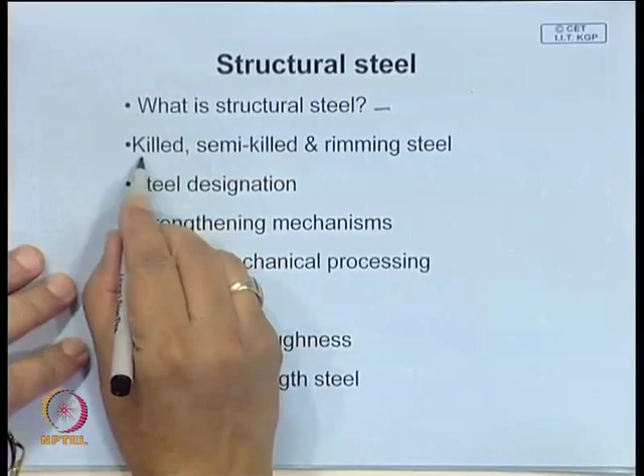Here we will first learn what structural steels are, then talk about a few important points. There are steels which we use, put into three categories: killed steel, semi-killed steel, and rimming steel, and we will learn what they are and how they are produced. We will also learn a little bit about steel designations.

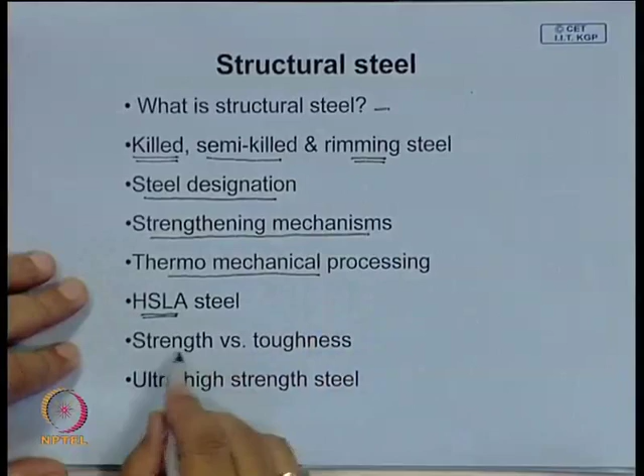We will talk about strengthening mechanisms, and find out which mechanism is most applicable to improve the quality of structural steel. We will talk about thermomechanical processing, by which this is achieved. We will talk about high strength low alloy steels, also known as microalloyed steel. We will talk about the relationship between strength and toughness, and also learn what is meant by ultra high strength steel, how they are produced, and what goes into improving the strength of steel.

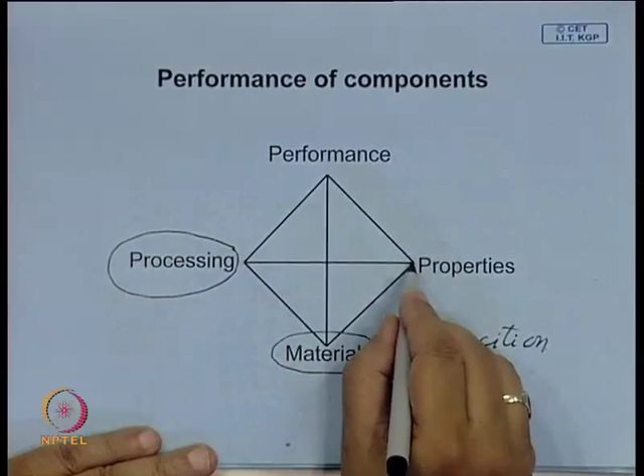We talked about this tetrahedral concept, where the properties of materials depend on composition, that is, the chemical composition determines the property. Similarly, the property also depends on how you process the material. For example, a fine grain structure will have higher strength, so how do you produce a fine grain? All of this affects the properties, and together these affect the performance.

Last class we talked about the limitations of hardening a steel, because this is totally dependent on the section size, and in many cases if the section size is large, it cannot be hardened. We have seen that by quenching, the strength of steel can be increased manyfold, so this would obviously be the most obvious choice for strengthening, but it cannot be applied because a full martensitic structure can be attained only over a very limited thickness, depending on the type of steel used. This has been utilized effectively in certain cases by modifying the composition, and we talked about case hardening.

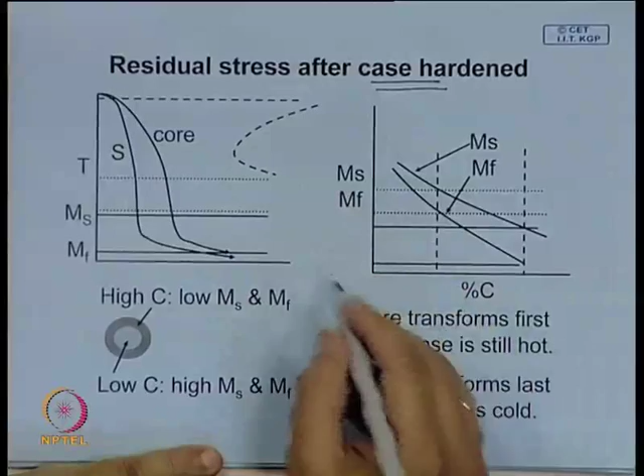I am projecting this here because I just realized there has been some mistake which I will explain. When you have a large section, you want the core to be tough, so one would prefer a low carbon steel. Since it cannot be hardened through and through, the attempt is made to enrich the carbon content of the surface by different carburizing processes like pack carburizing or gas carburizing. You increase the carbon content of the case while the core remains low carbon content.

When you make this modification, the MS and MF temperatures decrease. You will find that the case, having high carbon content, has a lower MS temperature and a lower MF temperature than the core. So the case has lower MS and MF temperatures than the core. When you quench or cool this job, trying to cool it fast, the core, being the inner portion, always cools more slowly than the surface. But in spite of this, the core crosses its MS temperature before transformation begins in the case, although the case temperature is lower at any instant.

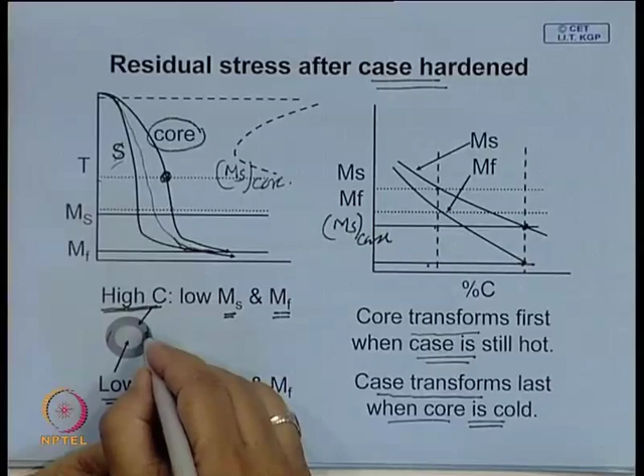So the trick is the core transforms first when the case is still hot. Therefore, when the core tries to expand, that case can deform and accommodate the strain. Later, the case transforms last, when the core is cold, so the core will not allow this to expand. Therefore, a residual compressive stress will develop on the surface.

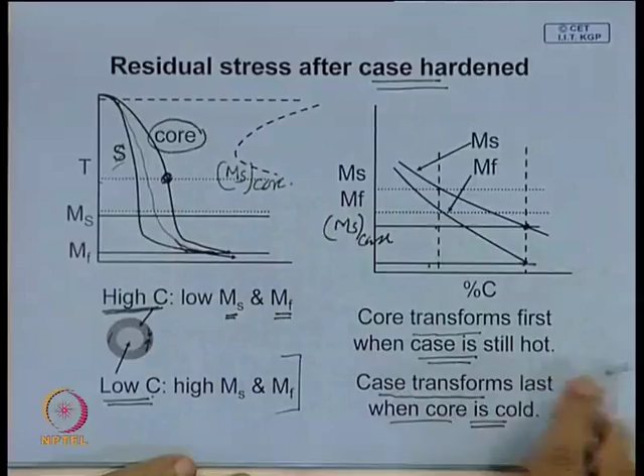This is the reason why, because of this difference in Ms and Mf temperature, by modifying the composition it is possible, through case hardening, to introduce a favorable residual stress - that is compressive residual stress - at the surface, and by that you improve the performance of this component. This same basic principle has been used in structural steel as well, and we will see how this is done.

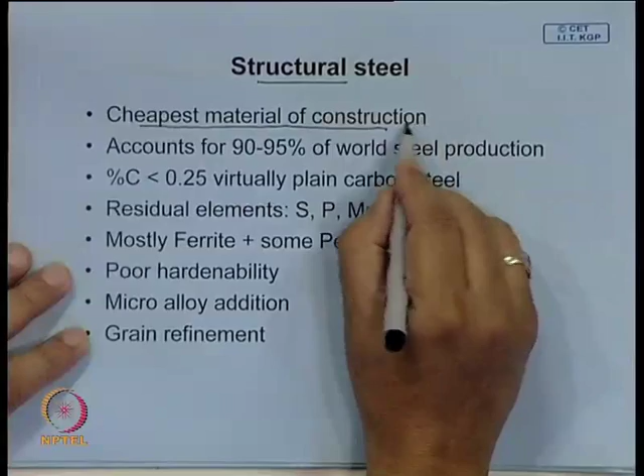Now, what is meant by structural steel? It is the cheapest material of construction. Bulk of construction is made of structural steel, and cost-wise, possibly only cement concrete structure is cheaper, and the next cheapest material of construction is structural steel.

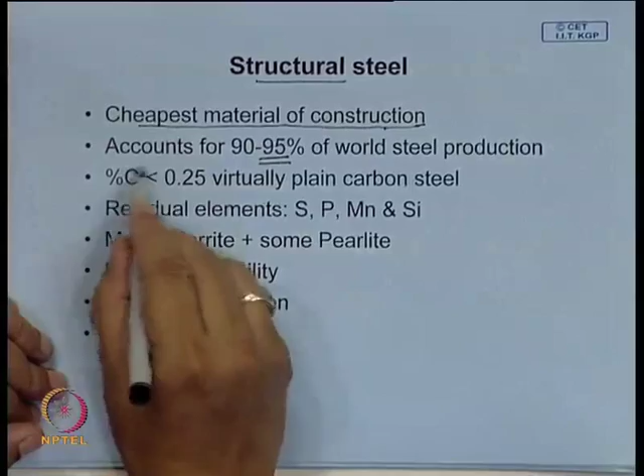It accounts for bulk of world steel production, maybe 90 to 95%. Bulk of this production actually is for structural steel, and we call any carbon steel less than 0.25 carbon relatively low - it is virtually plain carbon steel. It has some residual elements which are not intentionally added, which are listed here.

Sulfur is undesirable - it gives hot shortness, makes hot working difficult, and to overcome this some amount of manganese is added to steel. Phosphorus is also detrimental.

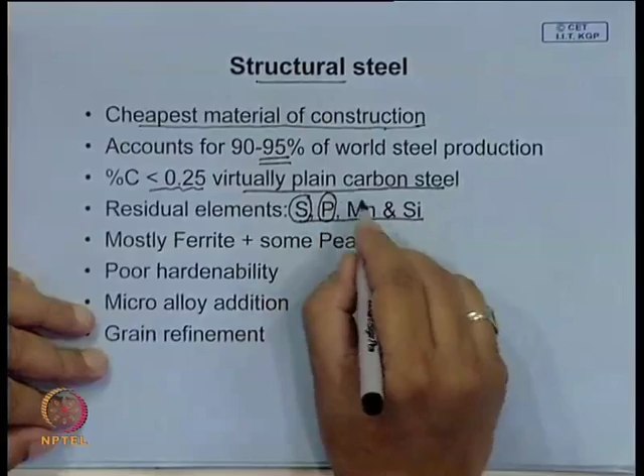It has a very high hardening coefficient, it increases strength of ferrite significantly, it improves the solid solution strengthening - it is a very important solid solution strengthener for ferrite - but it segregates to grain boundaries and makes the steel brittle, and it is actually responsible for cold shortness. It is brittle at low temperature.

Manganese is often used to overcome the bad effect of sulfur. It forms manganese sulphide, which has a high melting point, and therefore it is distributed uniformly in the steel, so it overcomes the problem associated with hot shortness. Silicon is often used as a deoxidizer, and it also has some beneficial effects as well.

But the amount in which they are present is very less - sulfur, phosphorus - you will never have more than, very rare to have more than 0.05 of these, or even better quality steels these days have even less sulfur and phosphorus.

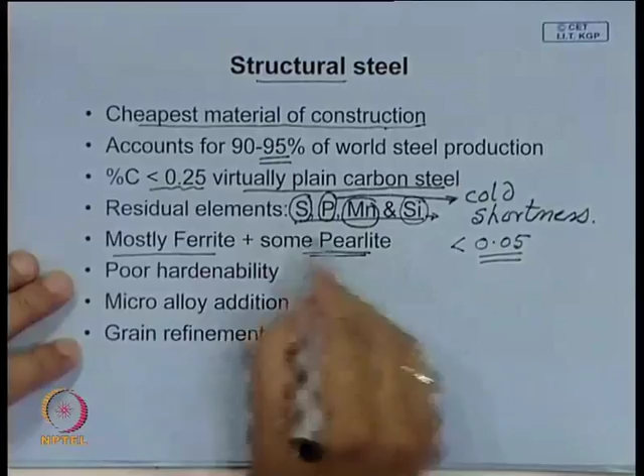The microstructure of structural steel is mostly ferritic. It may have some pearlite depending on the carbon content. Many of these grades have as low a carbon content as 0.07, so virtually it will be made up of mostly ferritic matrix with very little amount of pearlite.

Because it has low alloy element, it has poor hardenability, so martensitic strengthening will not be applicable - strengthening by hardening cannot be done over here. Often you may have some micro-alloy additions, very small amounts, even less than say 0.1 or 0.05, and certain elements, if added in such small amounts, combined with thermomechanical processing, make it possible to refine the structure, make the grain size very fine, and thus improve the strength of steel.

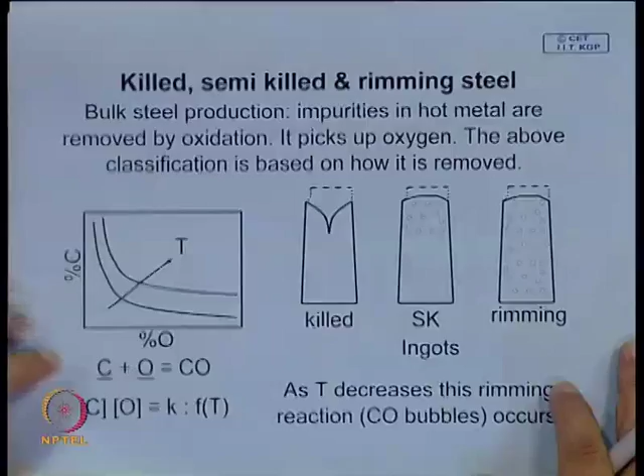Now let us see what are the factors - I think this was done, but to recapitulate, let us go over a few lines about the three major classifications of steel.

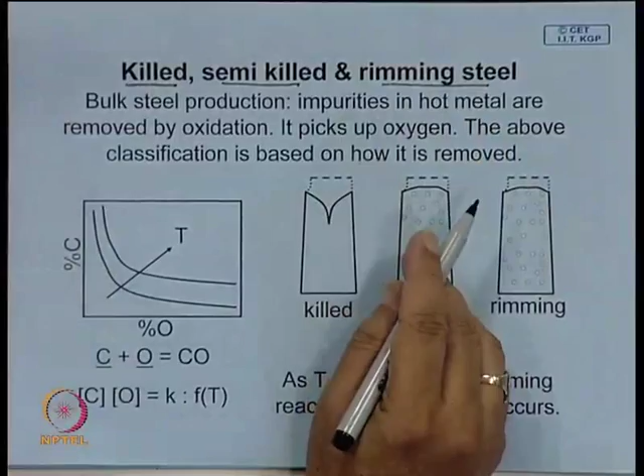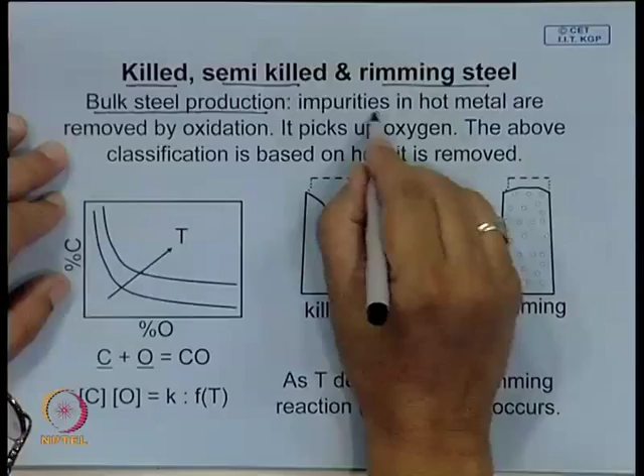It is based on the way the steel is deoxidized. If you look at the bulk steel production technique, it is produced from hot metal, which comes from, let us say, a blast furnace - hot metal which is actually cast iron. It has very high carbon, carbon content may be around 4%, it has silicon also, and these impurities - it also has sulfur, phosphorus - and they must be removed to make it steel, because such high carbon material is extremely brittle, they cannot be formed.

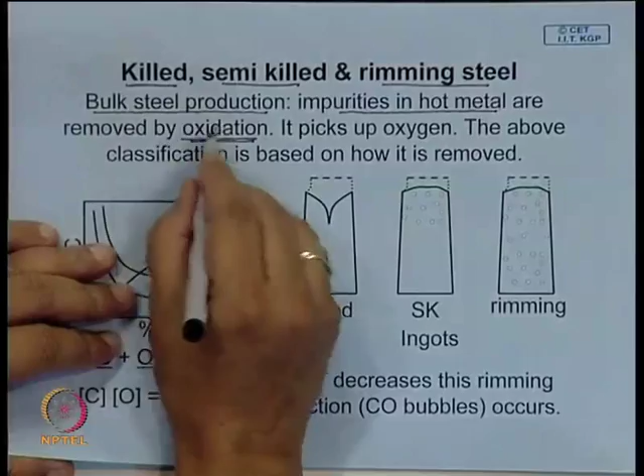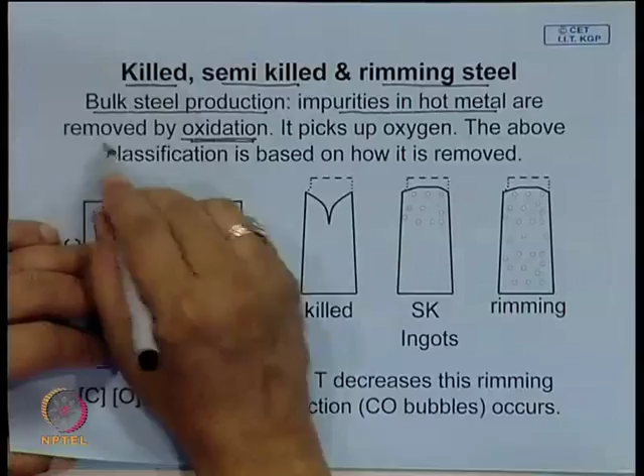So therefore these impurities are to be removed, and this removal is done by an oxidation process. In basic oxygen furnace, BOF, oxygen is blown from top, and then this oxygen reacts with these impurities, and these impurities are absorbed in slag. In the process, since the atmosphere maintained in the furnace is an oxidizing atmosphere, steel also picks up oxygen - this oxygen is in a dissolved state in liquid iron.

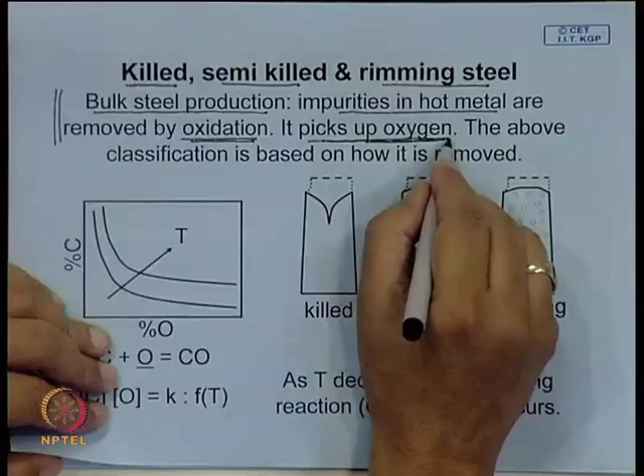And this has to be removed, because as you cool down, unless you remove that, if you do not do any special treatment, you often find that this steel, when it solidifies, there is a vigorous reaction taking place.

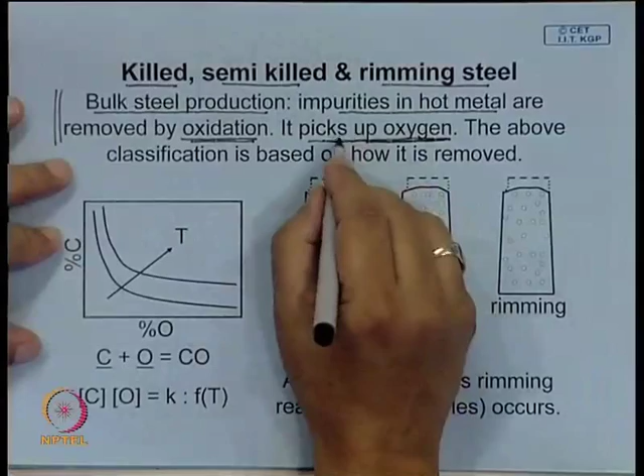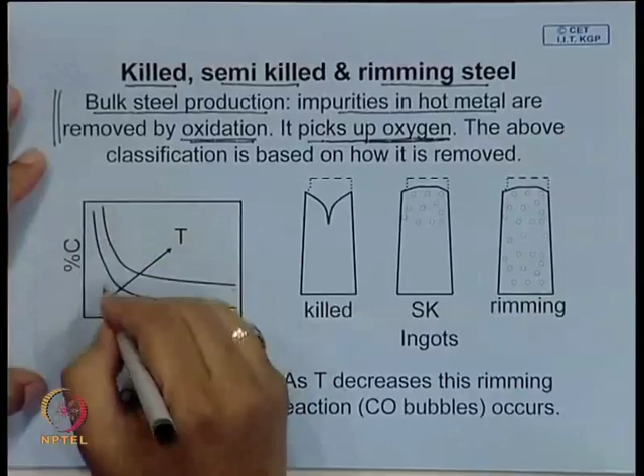This is primarily because the solubility of oxygen in molten iron depends on other alloying elements, particularly carbon. You are trying to remove carbon by oxygen, and the soluble amount of carbon and oxygen that can remain in solution in iron is given by this equilibrium reaction. The product of concentration of carbon and oxygen in steel is called the solubility product, and this product is a function of temperature, it is constant. If you plot a graph of percentage soluble carbon versus soluble oxygen in iron, you get a hyperbola, because this equation is that of a hyperbola. Higher the temperature, higher is the solubility product, so at higher temperature, for a given amount of oxygen, you get a higher amount of carbon.

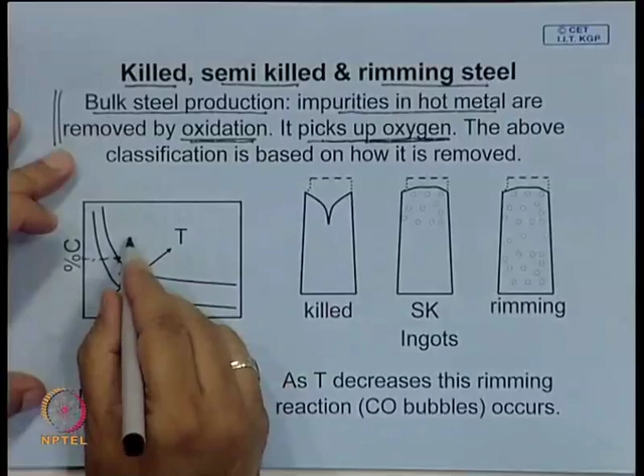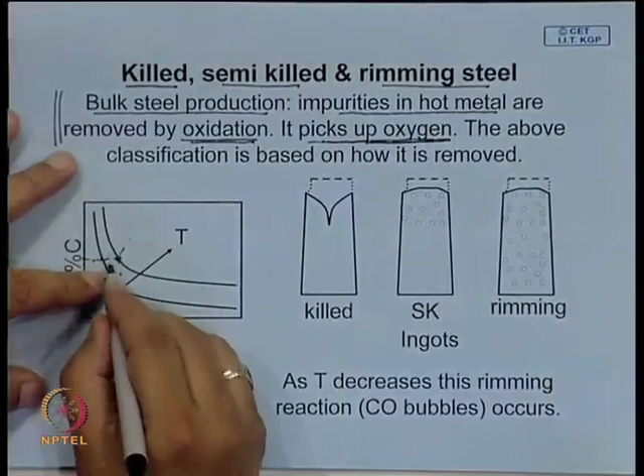But when you cool the steel, when you pour the molten metal into an ingot like this, what happens as the temperature goes down? At higher temperature it has higher carbon, and that carbon has to come down. As carbon comes down, oxygen solubility also decreases. So what happens to that excess carbon? It reacts and forms CO bubbles, and these bubbles try to form vigorously. This reaction is extremely vigorous and has to be controlled properly.

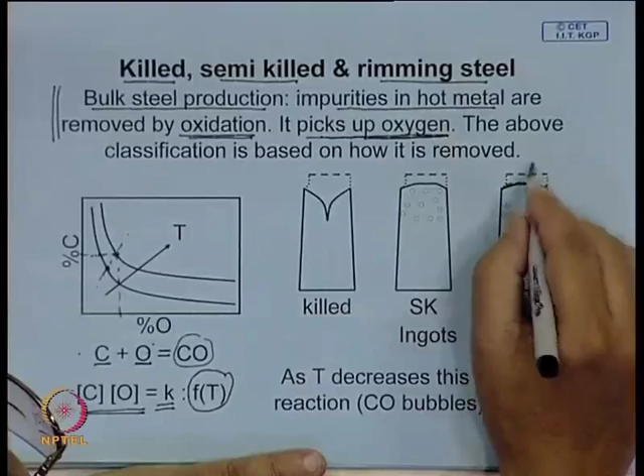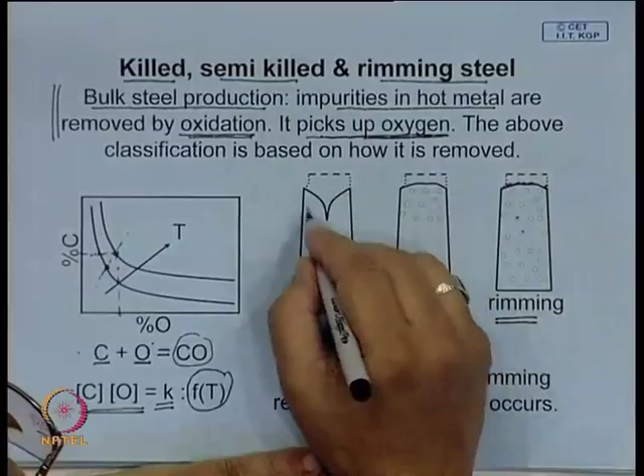Normally, when molten metal solidifies, there should be contraction, and you usually get this kind of shrinkage cavity. Whereas in this particular case, if this vigorous reaction takes place, it is called a rimming reaction or rimming action. Some of the CO bubbles are not able to escape because a crust forms, and in that case you have steel full of these CO bubbles, which compensates for the shrinkage cavity. This has one advantage: higher yield. But it has a problem: some amount of dissolved oxygen remains in the steel, and oxygen makes the steel brittle. So rimming steel, although during subsequent rolling these pores seal up, because of some soluble oxygen in the steel, it has relatively poor ductility and a higher transition temperature.

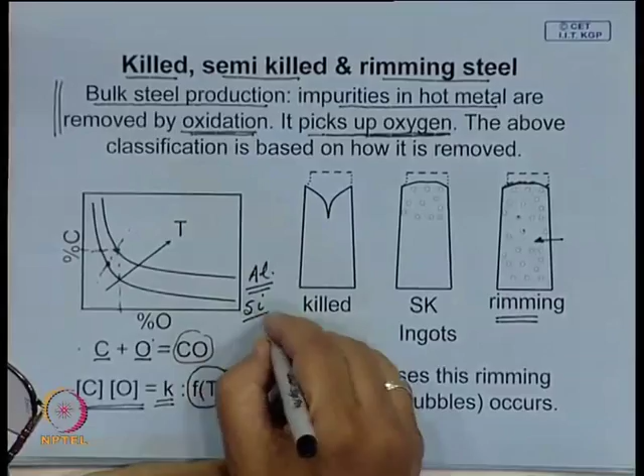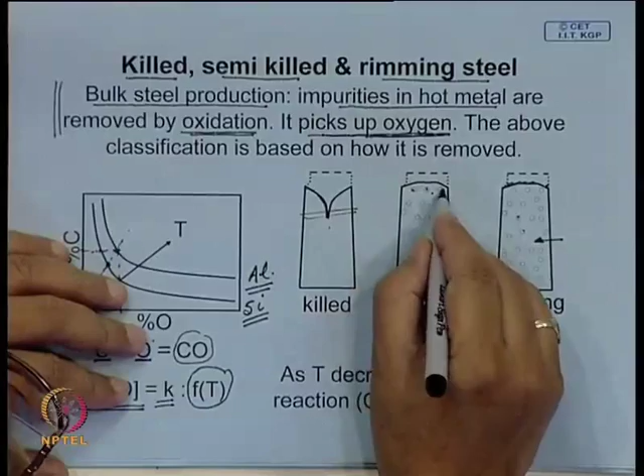At the other extreme, if you add a deoxidizer, one preferred deoxidizer is aluminum, which has a very strong affinity for oxygen, or silicon. This oxygen gets used up, and depending on what you add, you can stop this rimming reaction completely. In that case you kill this very reactive steel, and therefore you get a large shrinkage cavity. When you roll it, the yield is low because later you have to crop a certain part which cannot be shaped into flat products or sections. In between, it is also possible to control the amount of deoxidizer so that you control the rimming action and do not allow full shrinkage to take place. So some amount of CO bubble is allowed to form, and by this the yield can be increased.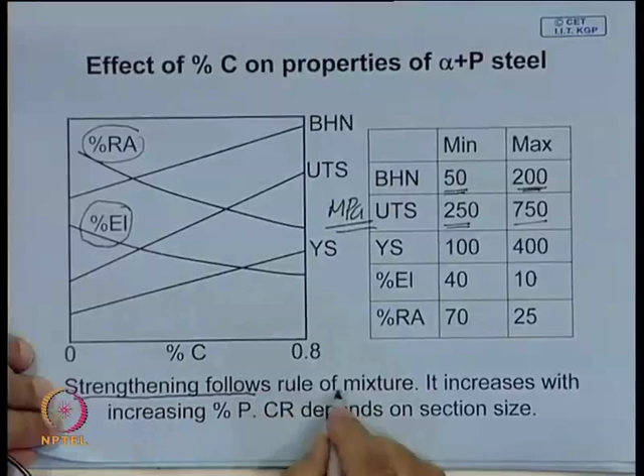So strengthening in these types of grades follows the rule of mixtures. If you increase the amount of pearlite, its strength will increase, and by controlling the cooling rate it is also possible to control the fineness of pearlite. If you increase the cooling rate, the pearlite becomes finer, and then the strength will also increase.

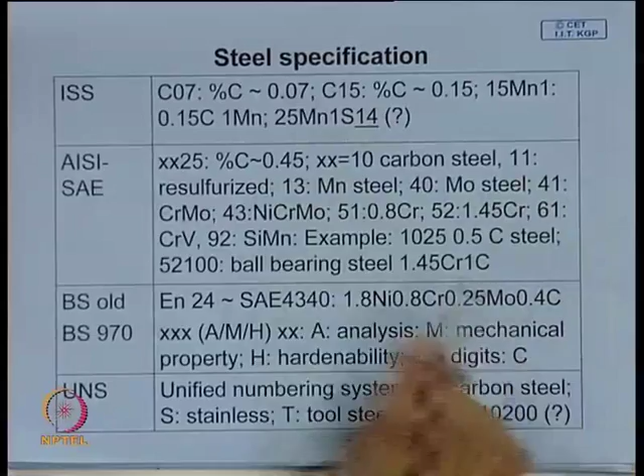Now, a few points about steel specifications. Most specifications are based on compositions. Different countries follow different standard specifications, which are listed here.

Suppose it's a plain carbon steel, one way of representing it is C07. Here, this number represents percentage carbon, where you divide by 100. So 0.07% carbon, this steel C07 represents this.

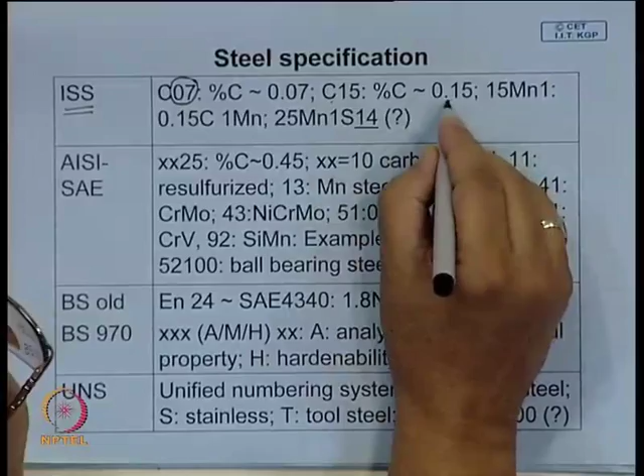C15 means carbon content is 0.15. Sometimes you have certain other alloy elements, and there you do not write C, you write the main alloying element present. So you say 15Mn1, where the first two numbers represent carbon content, that is 0.15, and the second number gives the manganese content, 1% manganese.

Sometimes there are more elements. There are certain grades where normally sulfur is undesirable, but there are certain grades where you add sulfur, particularly where you need very good machinability. There you need a little bit of inclusions made of manganese sulphide, which improves the machinability of steel. So this is one such steel: 0.25 is the carbon content, manganese is 1, and sulfur is 0.14.

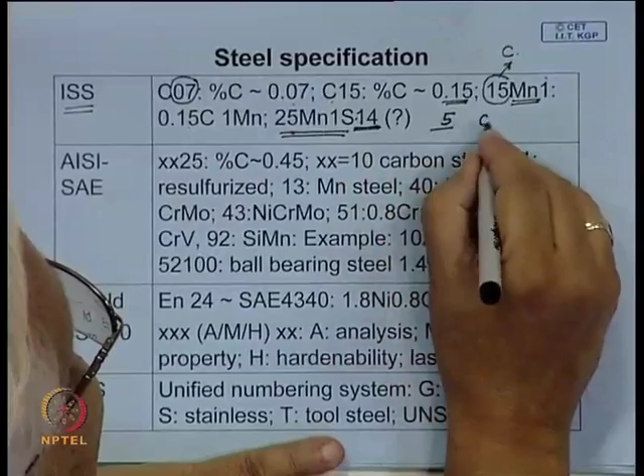Sometimes you use an underline to show that this is 0.14, not 1.4 or 14, which would be unexpected, unheard of. So if any number is underlined, say 5 underlined, that means 0.05, or 15 underlined means 0.15.

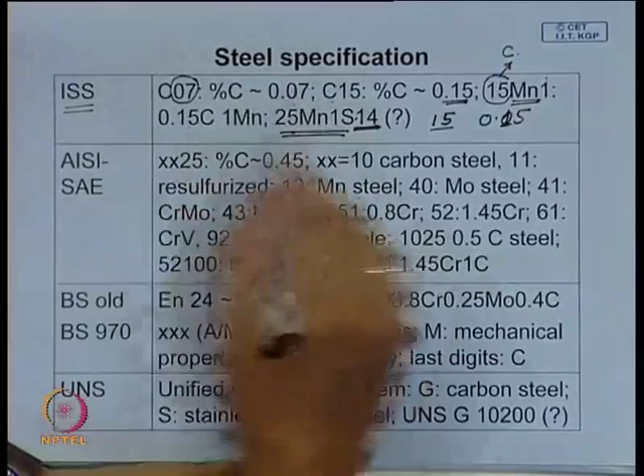Many of these systems have been derived from the system followed by the American Iron and Steel Institute, or the Society of Automotive Engineers. So this AISI specification is written like this: you use 4 digits, the first 2 digits represent the type of steel, and the last 2 digits represent carbon content.

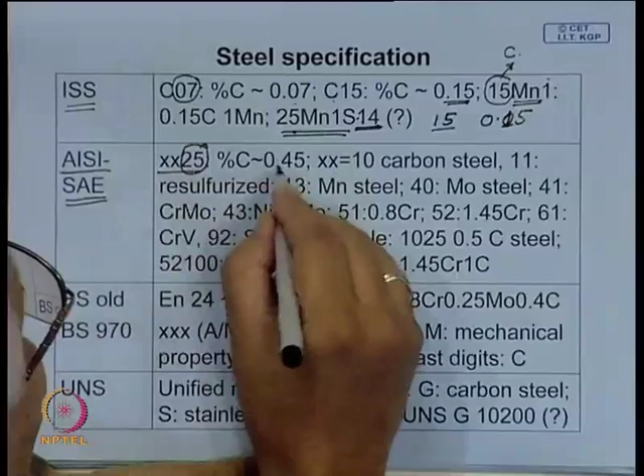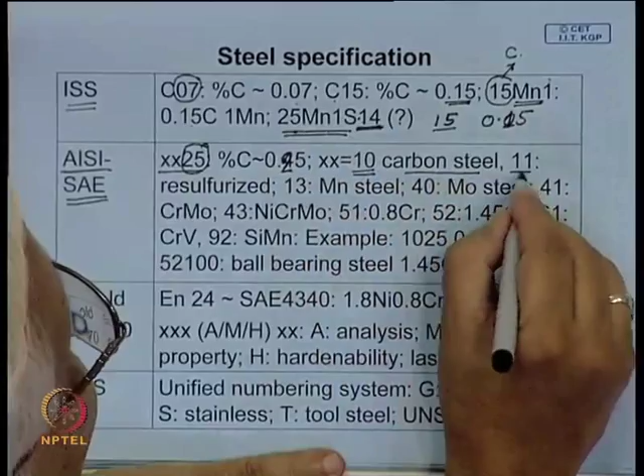Like XX25, this 25 means the carbon content is 0.25. If the first two digits are 10, it means plain carbon steel. If the first two digits are 11, this is resulfurized steel.

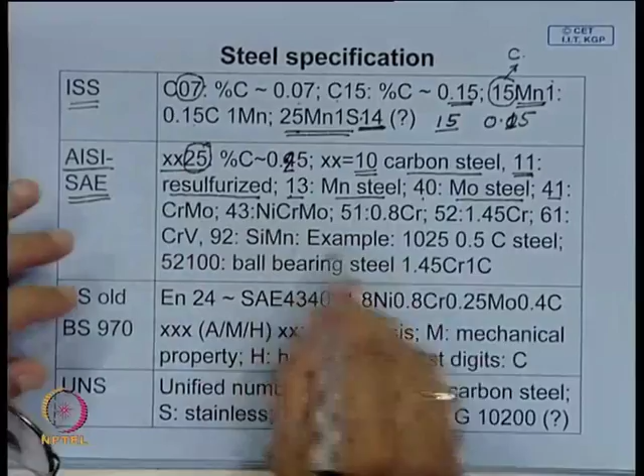13 means manganese steel, 40 means moly steel, 41 means chromium molybdenum - this is a convention, there's no real basis, but if you follow it, it's possible to guess the composition and major alloying elements, where the alloy content may not be much larger, maybe 1% or 2% around that. 43 means nickel chrome moly. First two digits 51 means 0.8 chromium steel, 52 means chromium steel - this is a bearing steel with 1.45 chromium. 61 means chrome vanadium steel, and 92 means silicon manganese steel.

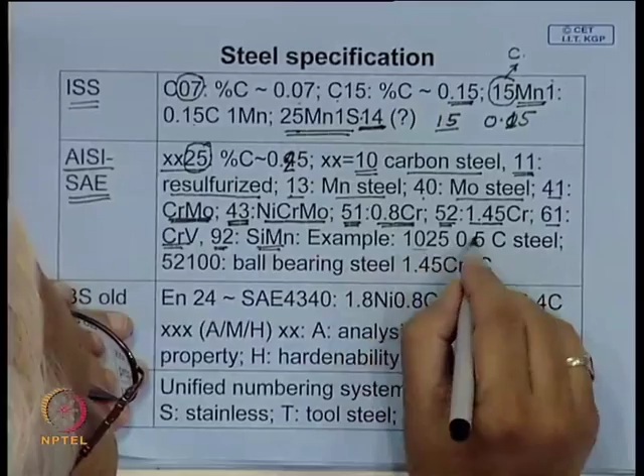So one example given here is 1025 - the carbon content is 0.25 carbon steel. This is a ball bearing steel, 52100, which has 1.45 chromium, and the last 3 digits represent carbon content, where carbon is 1%.

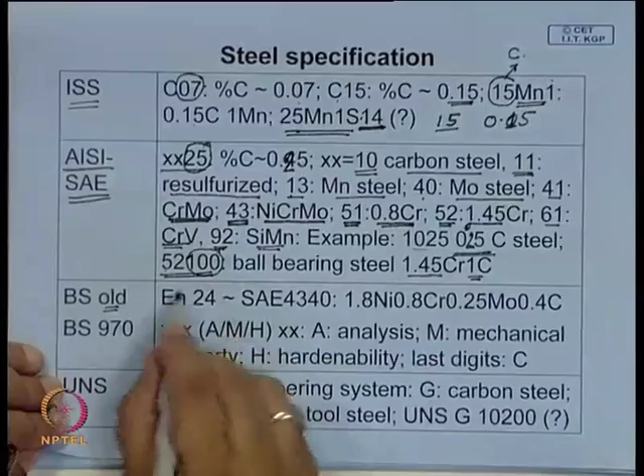Now for British specifications, the old specification has no real basis - these are certain numbered engineering steels, like EN24, which is equivalent to SAE 4340, and this is the composition of that steel.

The new BS spec uses digits like this: the first 3 digits signify the composition alloy element, and the last 2 digits give the carbon content. It also uses certain letters A, M, H, which indicate whether the specification is by analysis, by mechanical property, or whether it is a hardenable grade.

This specification varies from country to country, and attempts have been made to use a unified numbering system - the UNS system. Here the letter grade represents the type: G for carbon steel, S for stainless steel, T for tool steel. You can see this is simply a plain carbon steel, and you'll find this will be a 0.2% carbon steel.

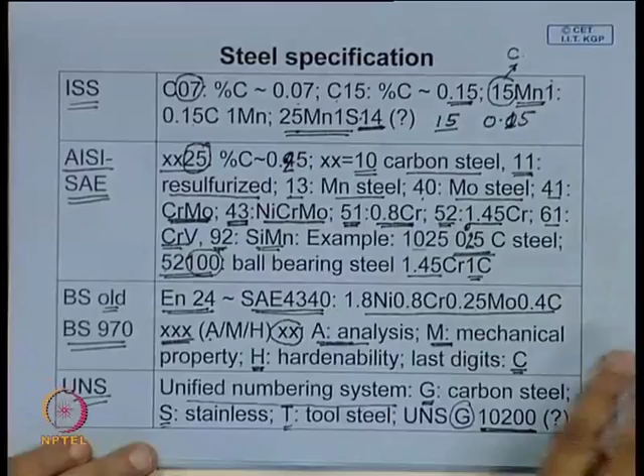Now, we have talked about some steel specifications. We also learned that structural steel is basically plain carbon steel. Let us see what type of strengthening mechanism will be applicable here, because the section size can sometimes be very large, and since it has low carbon content and low alloy elements, it has little hardenability. So the strengthening mechanisms normally applicable in steel are listed, but all may not be applicable. We will see which will be most preferable.

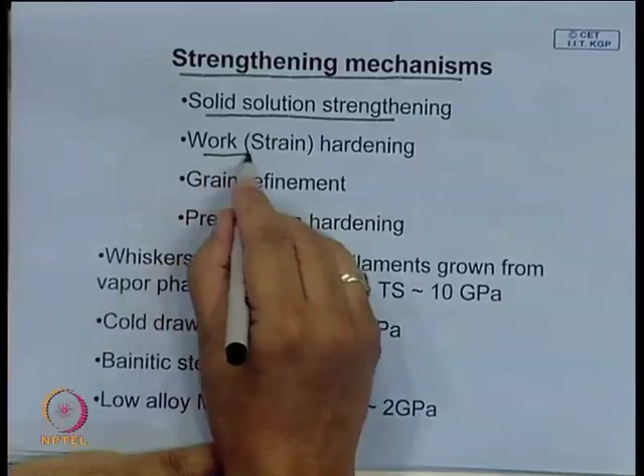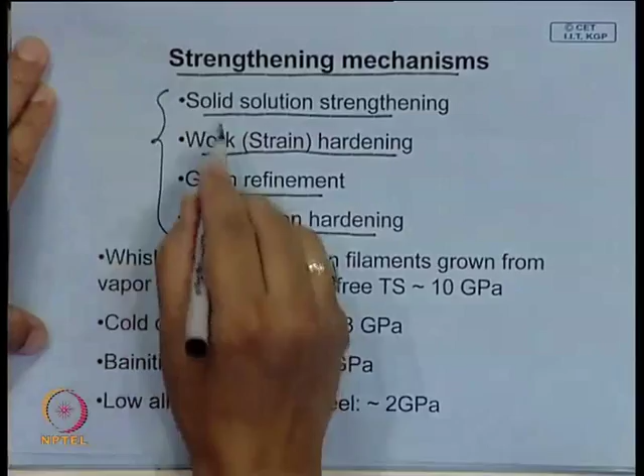One is solid solution strengthening, which we learned about earlier, then strain hardening or work hardening, grain refinement, and precipitation hardening. These are the common strengthening mechanisms used to improve the strength of steel, and for any metal and alloy, these are the basic strengthening mechanisms.

Just to give an idea, what is the strength of steel? Iron can be made in the form of whiskers, which are very fine filaments grown from vapor phase, and these are so fine that normally we have seen dislocations have a stress field, and two dislocations cannot stay very close by. So if it is possible to make a material where it is impossible to accommodate a dislocation, if the dimension is very small, it is quite likely that this material will be defect free. These whiskers are very thin filamentous crystals, virtually dislocation free, and their tensile strength is of the order of 10 GPa.

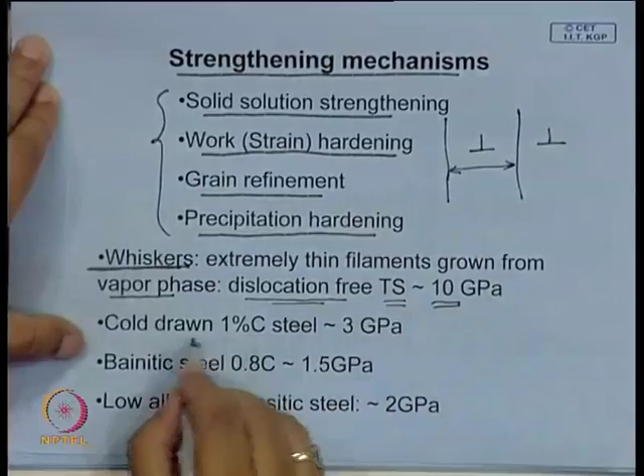By cold drawing 1% carbon steel, we will see how it undergoes a very special deformation process, by which you can achieve this in actual practice.

Bainitic steel strength will obviously depend on the amount of carbon present. If it is 0.8, you can get a strength level of 1.5 gigapascals, whereas low alloy martensitic steel you can get strength of a higher order. But very often the structural steel that we use is not martensitic, and let us see how we can strengthen them.

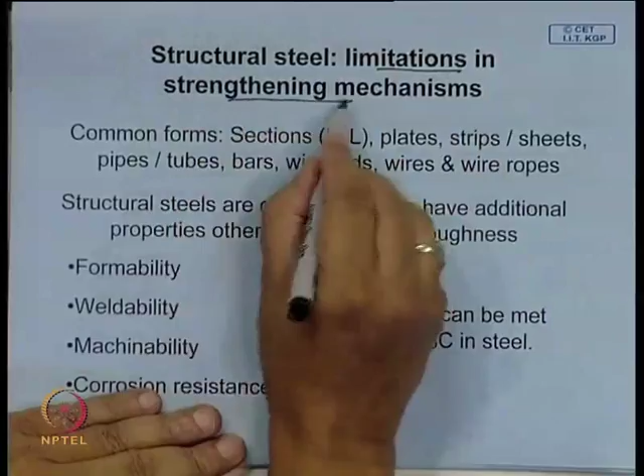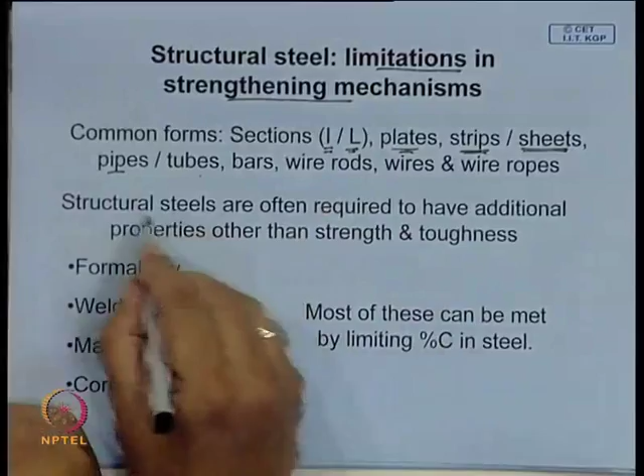Now, in structural steels there is a limitation in strengthening mechanisms. What are they? There are common forms of structural steel, say it could be I-beam, it could be L sections, it could be plates, strips, or cold rolled sheets, it could be pipes, tubes, bars, wire rods, wires, wire ropes.

So there are so many, and when these structural steels are made, they are often required to have not only strength and toughness, but certain other additional properties. This depends on the downstream application. Say suppose you want to form an automotive body made up of thin steel sheet, in that case the property we look for is formability, and often just formability is also not enough.

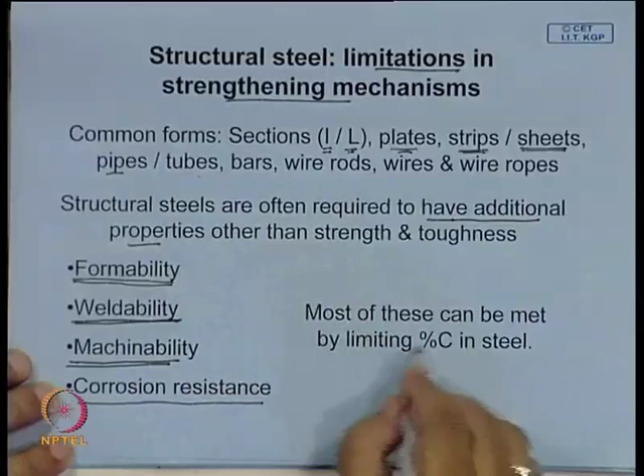Sometimes you have to join or give a proper shape, so it should be amenable to certain fabrication processes, like welding is one such fabrication process, so you have to look at the weldability. Sometimes for certain applications machinability is important, and in many applications you will also look for the material to be able to withstand corrosion, it should be corrosion resistant.

Many of these requirements can be met by limiting the percentage of carbon in steel. But the problem that comes up is if you decrease the percentage of carbon in steel, its strength will go down, and how do we make it up? Let us see how this is possible.

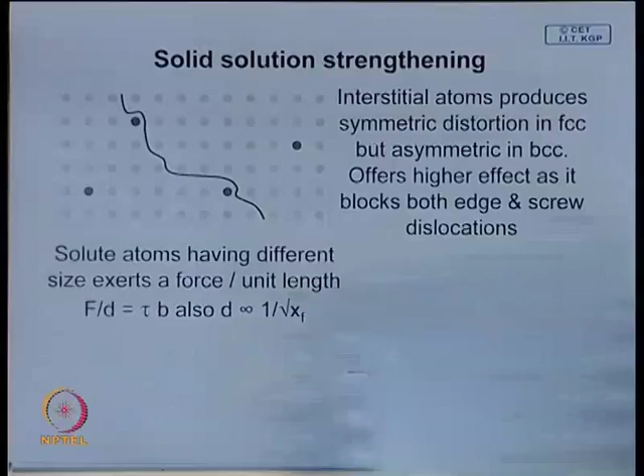Now, a quick look at solid solution strengthening. If you add a solute atom, it will have a different dimension, so there will be some elastic distortion, it will have a stress field, and we know that deformation takes place through movement of dislocations. Suppose this dislocation is moving in this direction, this is a stress field, so it is not free to move.

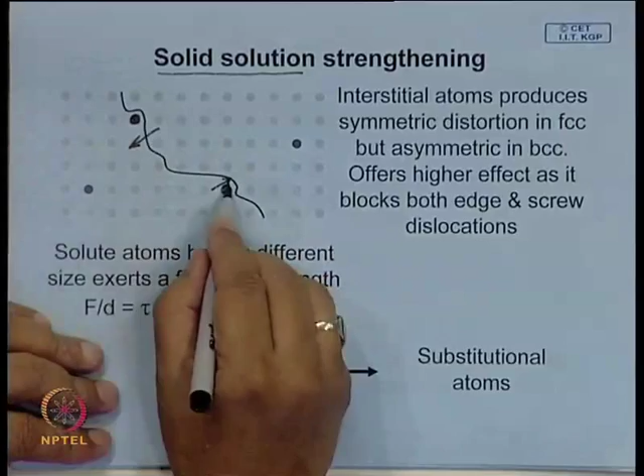So these dislocation movements are hindered by the stress field of the solute atoms, and the overall effect will depend on how closely they are spaced. So more the number of atoms, more will be the strengthening, and people have been able to work this out, which we will see quickly here on this sheet.

Now, it is possible to find out how much force is exerted by the solute atom on the dislocation, and this force will depend on the number of atoms. So what is more important is the force per unit length of the dislocation exerted by the solute atom. If d is the spacing between two solute atoms, then you can express this as the force per unit length, and to move the dislocation you apply a shear stress tau. In that case, the force on the dislocation will be tau times b, and both have to be equated.

If you equate the both, it is possible to find out a relationship between that. It is also possible, if you know the atom fraction of solute present, to show that the distance between two atoms will be roughly equal to 1 over root of the atom fraction of the solute element. If you substitute this, you find that the increment in tau, the shear strength, is proportional to the square root of solute content. This is the case where the solute atom is substitutional, and the same can be extended to interstitial atoms.

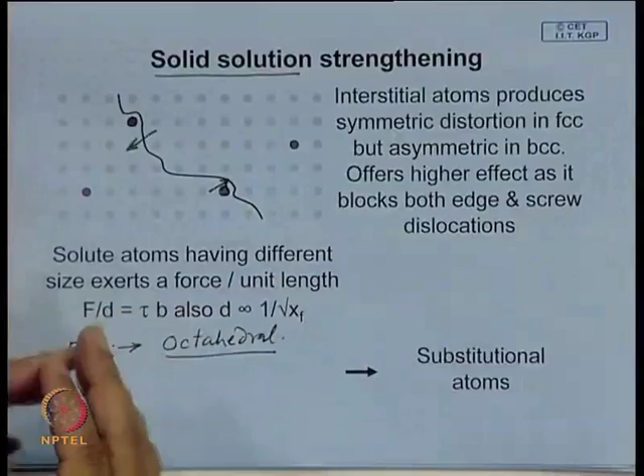For interstitial atoms, in face centered cubic, that is in austenite, carbon occupies the octahedral site, and these sites are symmetrical. In BCC lattice, even if the carbon atom occupies tetrahedral or octahedral sites, experiments show carbon prefers octahedral sites, but in BCC these octahedral sites are not symmetric; in one direction the gap is large, and in another direction it is shorter.

So when the carbon atom goes into the interstices, it produces expansion along one axis, the C axis, introducing a tetragonal distortion in the lattice. This distortion is quite large and is a more important factor for strengthening. Interstitial atoms therefore produce symmetric distortion in FCC but asymmetric distortion in BCC.

Asymmetric distortions are more effective in blocking dislocation movement, because uniform stress can only block edge dislocation movement, whereas asymmetric distortion produces shear stress and can block screw dislocation motion as well. So they are a much more effective barrier to dislocation motion and give a high strengthening effect, proportional to the number of atoms present, that is, proportional to the square root of atom fraction. This relationship applies to interstitial atoms, and the earlier one to substitutional atoms.

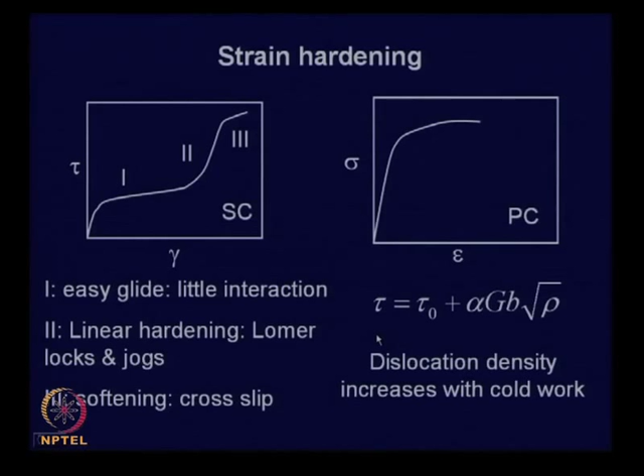Another important strengthening mechanism is grain refinement. Consider a dislocation source acting within two grains. If the source operates, it generates dislocations, and as they move through the slip plane, they deform the grain. In doing so, a dislocation can encounter a barrier, stop there, and a pile-up develops, which also leads to strain hardening. Depending on the grain size, it has a limited capacity.

The grain can accommodate only a limited number of dislocations, and the grain boundary also has a finite strength. If the number of dislocations increases, the local stress on the grain boundary intensifies, and it can then move across the grain boundary into the next grain, or move from here to the next boundary, it is possible.

So, the grain size is an important factor. It determines how many dislocations this can accommodate. If you recollect your earlier lecture, it has been shown that the strength of a polycrystalline material is inversely proportional to the square root of the grain size, D, the average grain size. This is a diagrammatic representation: if you plot yield strength against 1 over root D, you get a linear line, and from this you can find out sigma 0 and k.

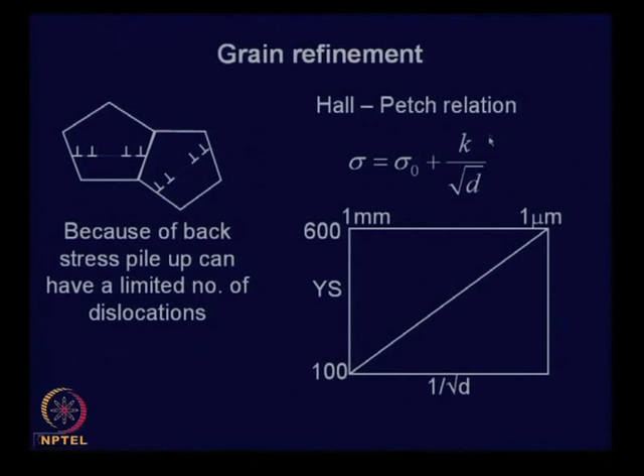So, to get ideal, maximum strength, what you need is a high degree of supersaturation - a supersaturated solid solution. Then when you age, the precipitate that forms must be coherent, and the coherent precipitate is always associated with some lattice strain. We talked about this lattice strain - if there is too much lattice strain, this will oppose the driving force for the precipitate trying to form, so too much lattice strain is also harmful. You may have some amount of coherency strain it can accommodate - basically low strain energy, not too much - coherent precipitate and high supersaturation. By controlling this, you can control the extent of precipitation strengthening.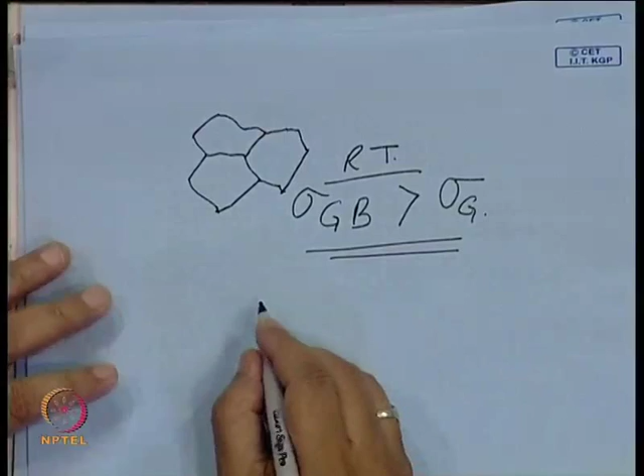When fracture takes place, there are certain crack paths which are favorable. At room temperature, we find these grain boundaries are stronger. Normally, grain boundary strength is greater than the strength of the grain. So if fracture takes place at room temperature, it is more likely that the fracture takes place through the grain.

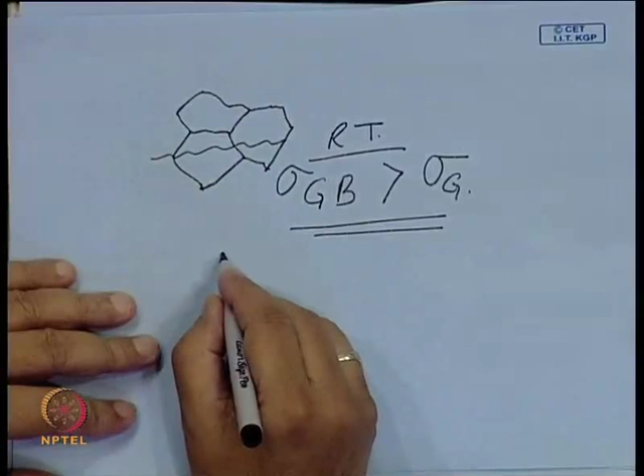In certain cases, some solute elements segregate to the grain boundary, and that makes the grain boundary brittle. Because of this segregation, cold shortness occurs at these grain boundaries, making them brittle.

One form of segregation is a thin network of brittle cementite, or a monolayer type of precipitate, say phosphorus segregating at the boundary. It makes the steel brittle because this provides an easy fracture path, so the crack can propagate along the boundary, resulting in intergranular fracture.

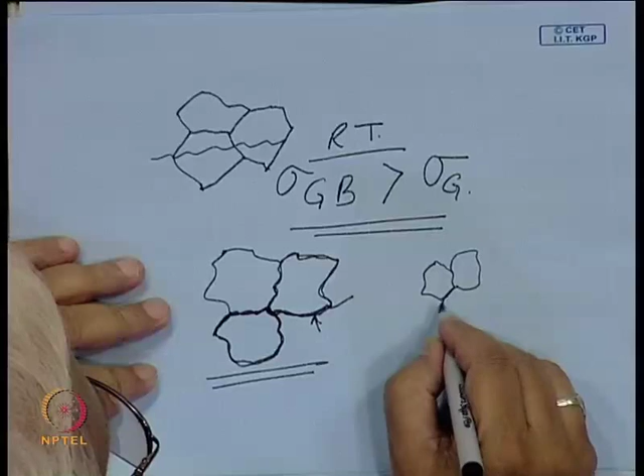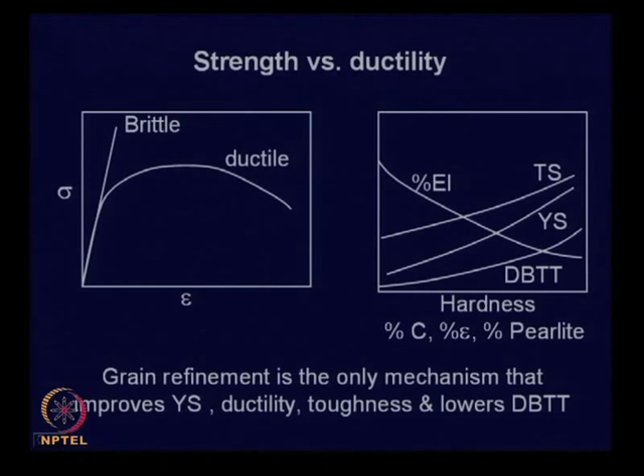If you make these grain boundaries finer, you reduce the chance of this segregation because you have more grain boundary area, so the chance of a brittle network forming is reduced. This is one reason why fine grain steel is more resistant to crack growth, a mechanism that helps improve strength without sacrificing ductility or toughness.

Now a quick look at how you control the grain size in steel. One method is by cold working and annealing. Through this process it is possible to get both very coarse grain structure as well as very fine grain structure.

This is a typical annealing curve. When you anneal a cold worked material, it has very high hardness. Consider it is a low carbon steel, mostly ferritic. In the recovery stage, there may be a little increase in hardness, this is strain aging.

Sometimes the solute atoms, particularly interstitial carbon and nitrogen, can precipitate and block the dislocations, causing a little increase in strength, but it helps remove residual micro stresses through rearrangement of dislocations. After a certain temperature, there is a rapid drop in strength.

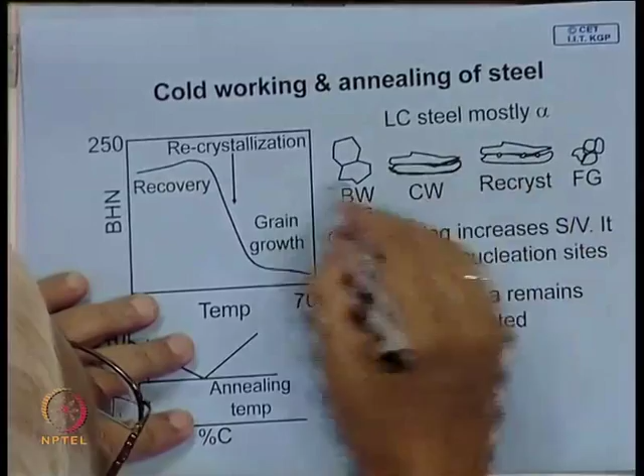Here, new recrystallized grains form, and these grains are strain free, as shown here. These are the grain structures before working, and when you cold work, the grains get elongated and you have a large grain boundary area. When you heat during annealing, the material has high elastic stored energy and tries to move to a position of lower energy.

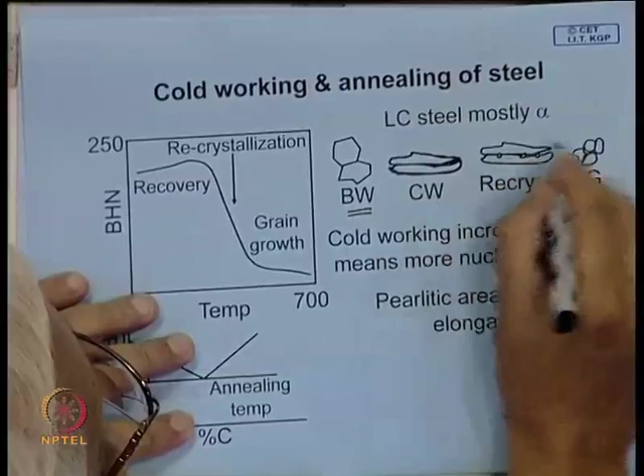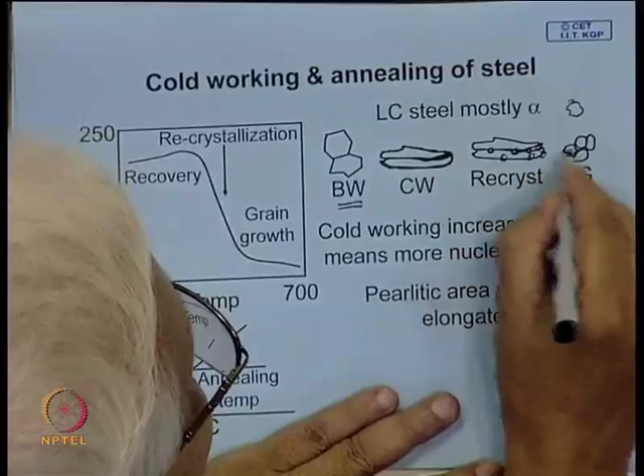There is a driving force existing, but a fresh grain cannot nucleate because to nucleate a new grain, new surface area has to be created. This surface energy barrier has to be overcome, and grain boundaries provide heterogeneous locations where it can easily be overcome. These are the nucleation sites, and as these grains grow, eventually all of the original structure is replaced by these fine grains. Cold working increases the surface area to volume ratio, providing more sites for nucleation of strain free grains.

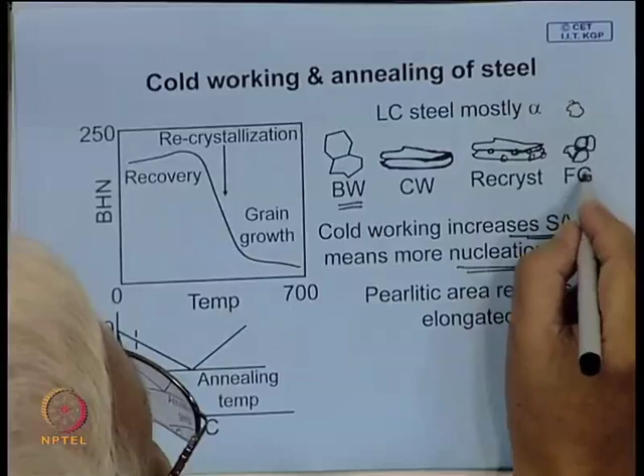So, higher the cold work means more nucleation sites, and finer will be the grain. By controlling the amount of cold work, it is possible to control the grain size. Usually the annealing temperature for cold working of low carbon steel is in this regime; you do not go to the austenitic region.

The pearlite area, if it gets deformed, will remain like this. They do not undergo any recrystallization, but the ferritic region will undergo recrystallization, and you will recall these are the critical nucleus sizes.

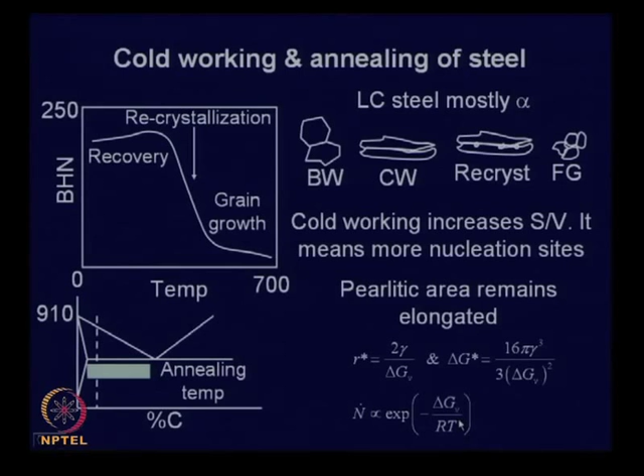This grain size is determined by the critical nucleus, which is inversely proportional to the cold work. Higher the cold work, finer will be the grain, and also higher the cold work, much lower is the activation hill to be overcome. So the nucleation rate will be faster, and faster nucleation rate means finer grain.

Now, hot working is a process where recrystallization and plastic deformation virtually take place simultaneously. It is possible to calculate the time it takes for recrystallization, because the recrystallization process is determined by the movement of iron atoms within the lattice, that is, self diffusion of iron.

The self diffusion coefficient is given by the exponential minus Q by RT, where Q is the activation energy. So if you know the activation energy for self diffusion, it is possible to calculate the time for recovery and recrystallization. Often, say at 800 degrees centigrade, you will find the time may be of the order of a few seconds.

That means by the time the job cools, if working at this temperature, the time for the job to cool to room temperature is enough for recrystallization to take place. So when the job cools, you find it is soft. Hot working is actually instant recrystallization on plastic deformation, which is pictorially shown here.

So you have this coarse grain initial structure, and during rolling these grains get elongated, and these are the nucleation sites. After this, since the temperature is high, fresh grains are forming. To get fine grain, what you can do is decrease the diffusivity.

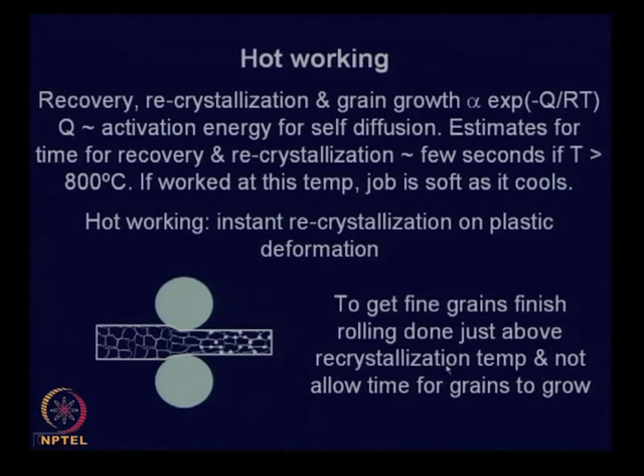And the finished rolling temperature is close to its recrystallization temperature, so as it comes out of the rolling mill, it does not get enough time for the recrystallized grains to grow. Also, the austenite grain size determines that finer structure.

If initial austenite grain size is coarse, and you deform it, the final structure is likely to be coarse. If initial austenite grain size is finer, and you deform it further, you make it more fine, and the chance of getting a fine grain is higher.

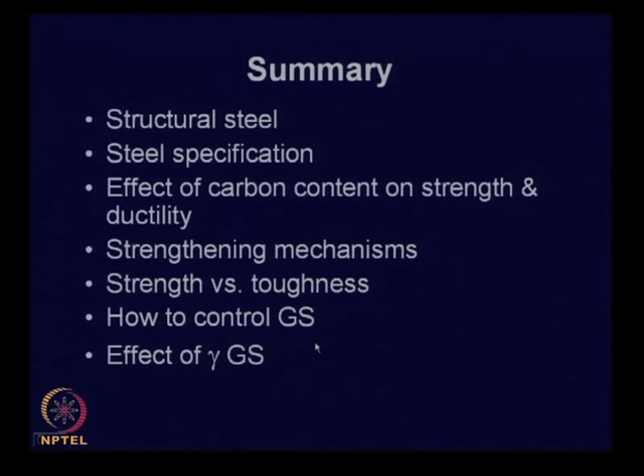To sum up what we covered today: we talked about structural steel, steel specification, and again emphasized the effect of carbon content on strength and ductility. We talked about strengthening mechanisms which have been or can be applied, the relationship between strength and toughness, and how controlling grain size makes it possible to increase both. We also discussed how to control grain size by controlling degree of working and the recrystallization temperature. We will see a little more about it in the next class. Thank you very much.